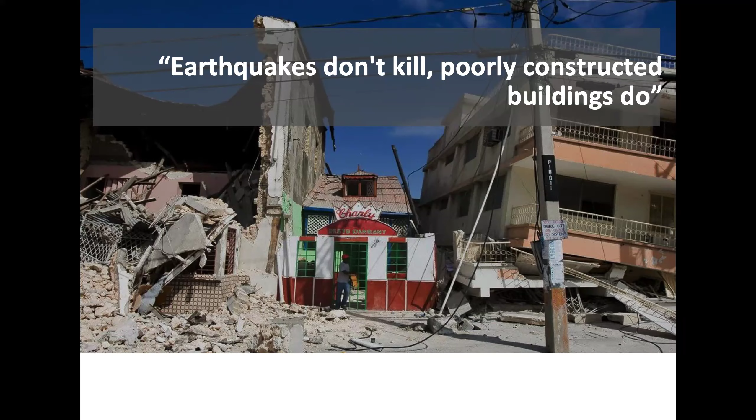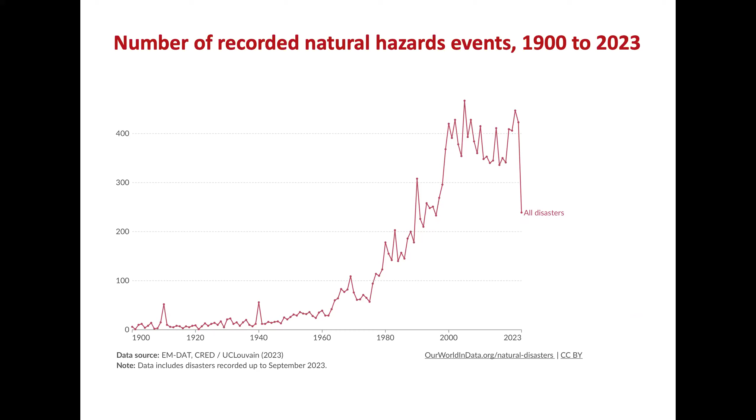And if you take the number of recorded natural hazard events from 1900 to 2023, this is a very, very good data set, and I'm glad that I managed to locate it. You can see the trend: the number of recorded natural hazards has been on the increase from 1900 to 2023. And if you do the same mapping based on the hazard type, with statistics from 1970 to 2023, you can see the distribution of natural hazards. It ranges from droughts, floods, earthquakes, and other extreme weather events, and so on.

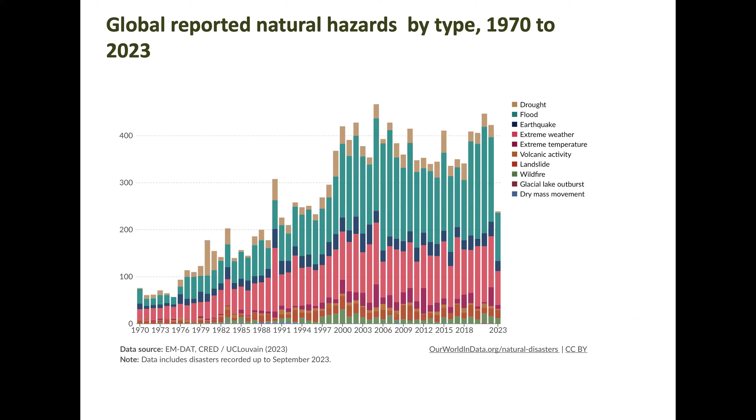So if you talk about the disaster losses due to natural hazards, it is fair to say that they are on the increase. It is said that the disaster loss calculation for 2023, again very up-to-date statistics, is US$250 billion, with more than 74,000 fatalities. And you can see the size of that: it roughly equals the entire GDP of either New Zealand or Portugal.

And thunderstorms in North America and Europe were more destructive than ever before. And you can also see the insurance figures here, US$95 billion, which is very close to the 5-year average, but it is above the 10-year average. So in that sense, I suppose the number of disasters and the disaster-related losses are quite an important point for us to consider.

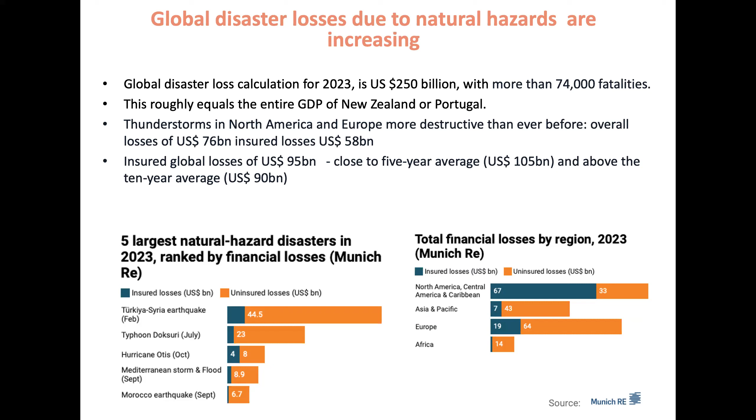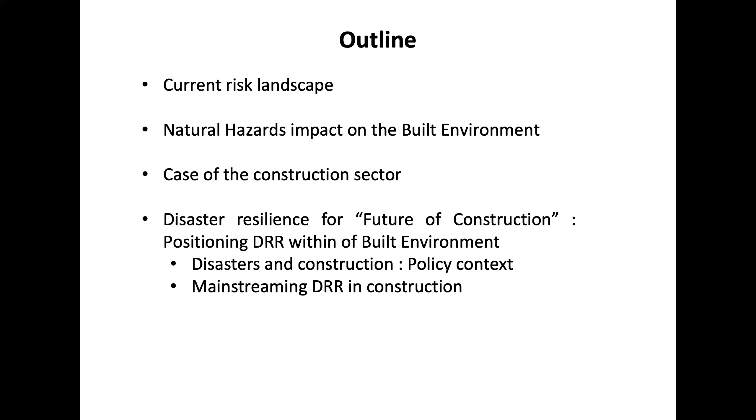So with that in mind, I just wanted to highlight the current risk landscape, which I hope I managed to give you a rough idea about. And then I will move on to the natural hazards impact on the built environment, and then reflect on the case of the construction sector. And then I wanted to put forward this notion which I want to identify as disaster resilience for the future of construction, and how we can position DRR within the built environment.

So I suppose this week is quite an important one, because we marked the first anniversary of the Turkey earthquake. I'm sure you have seen media outlets demonstrating various points. Just to reflect, in Turkey during the aftermath of the earthquake, around 37,000 buildings collapsed, with over 200,000 buildings heavily damaged, and around 53,000 lives were lost.

But within the backdrop of that, I'm sure you have seen these media cutouts saying, Turkey's earthquakes show the deadly extent of construction scams, and Turkey widens probe into building collapses as quake toll exceeds 50,000. So these were quite frequent sightings for us during the last year. And again, I have picked up some of the points from the media.

The plan was to build 319,000 safe homes, but having said that, Turkey's construction sector is struggling, and the number of newly constructed houses is nowhere near this number. It is estimated that the overall cost of the earthquake damage to Turkey is more than $103 billion, but so far the reconstruction effort has fallen well short of that mark. And critics say there's cause for concern about both the pace and the quality of the reconstruction. So this is quite an important point, bearing in mind the topic of today's talk.

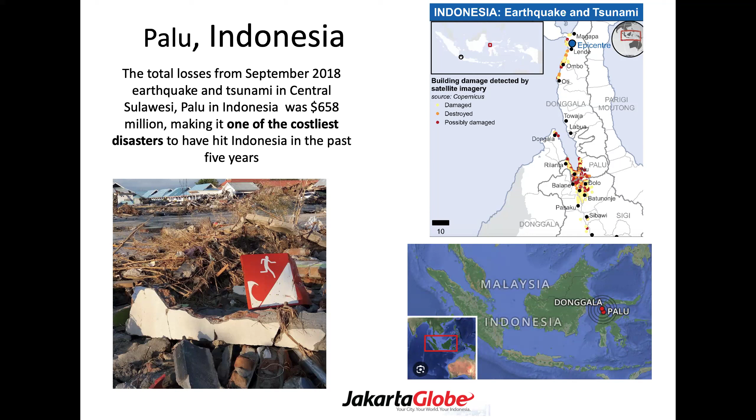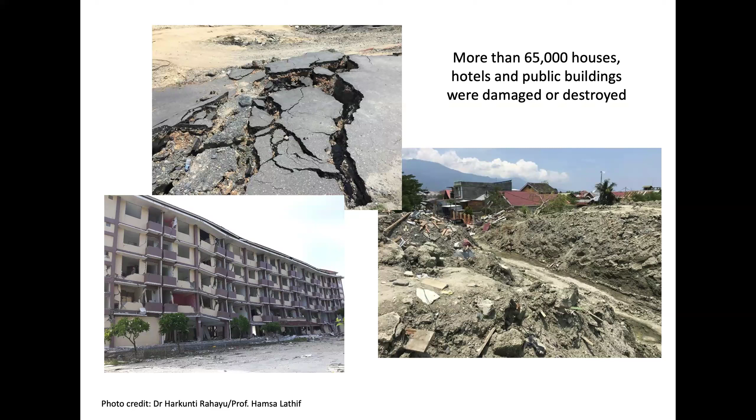If we move on from Turkey to Indonesia, the Palu, Indonesia earthquake in 2018. The damage due to the Palu earthquake amounted to $658 million, and it was one of the costliest disasters to have hit Indonesia in the last 5 years. In the map, you can see the location of Palu, on the island of Sulawesi. And more than 65,000 houses, hotels, and public buildings were damaged or destroyed due to this earthquake.

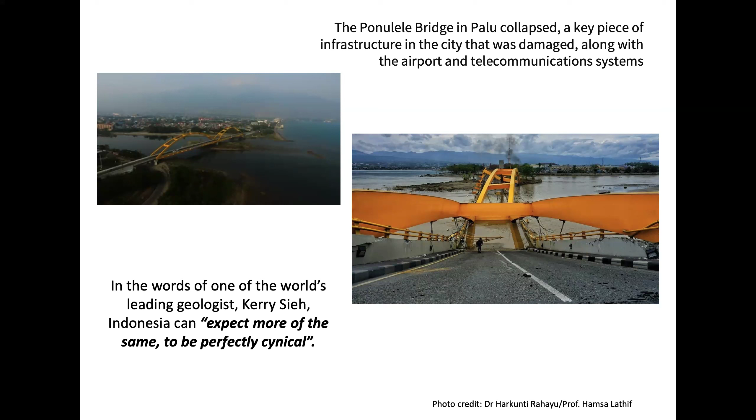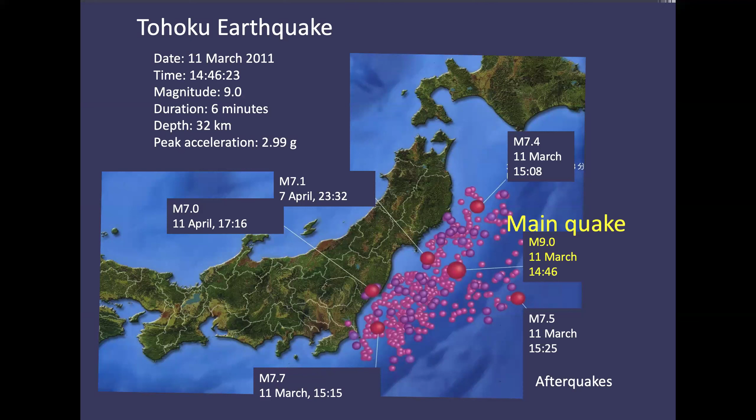And very briefly to reflect on the Tohoku earthquake, getting back to 2011. So again, you can see the map of Japan here, and the main quake was 9 points on the Richter scale. It occurred on the 11th of March 2011. And many government officers and researchers say the Tohoku earthquake was unthinkable, and I'll tell you why.

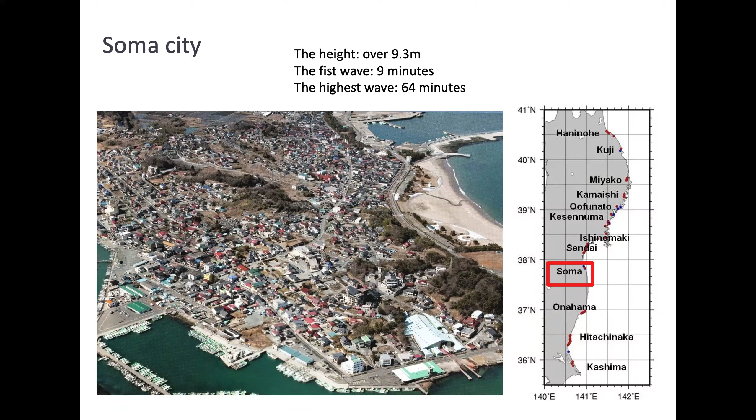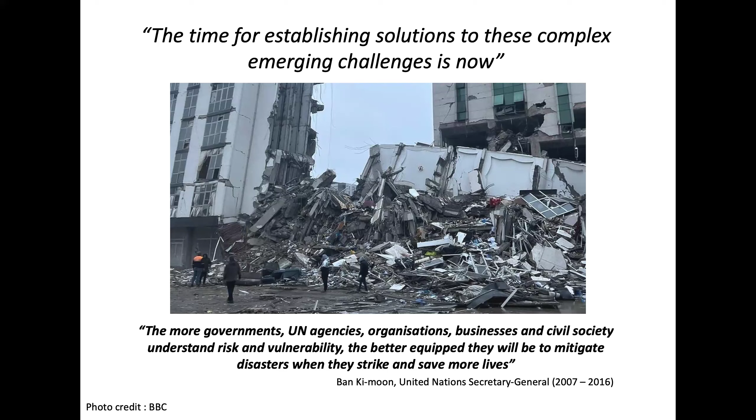So if we move on to the case of the construction sector, needless to say, I'm stating the obvious here. The construction sector is of strategic importance across the world. It delivers the buildings and infrastructure needed by the rest of the economy and society. And not only that, the construction value chain includes a wide range of economic activities, going from the extraction of raw materials, the manufacturing and distribution of construction products, up to design, construction, management, and control of construction works and so on.

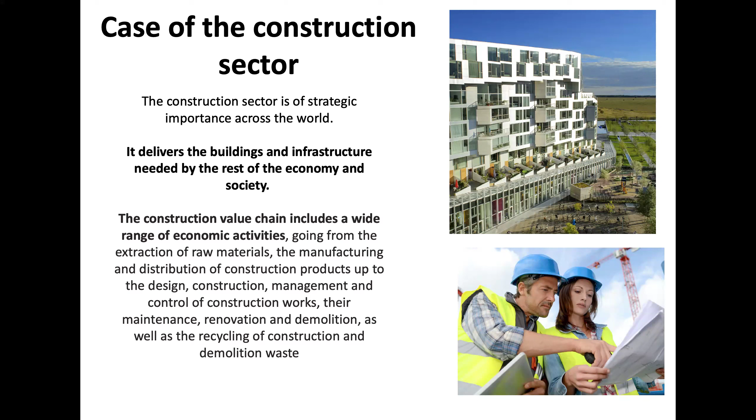So just to reflect on the size of the construction sector, this is a snapshot of the UK construction sector. The market size in 2022 was £473.5 billion. And there were 170,000 people attracted to the sector. And it contributes 7% of the GDP. And not only that, it provides a significant multiplier effect to the wider economy. And on the negative side, it consumes 40% of the UK energy, half of our water and a quarter of all the raw materials.

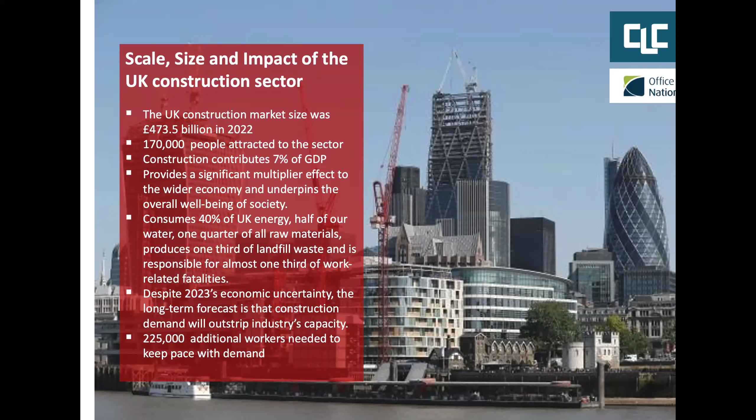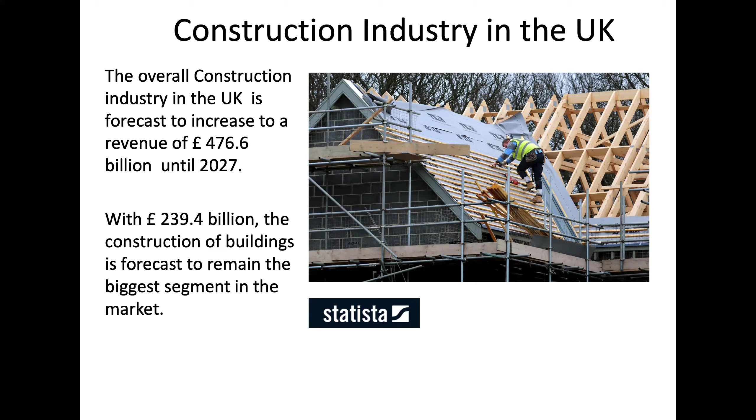But having said that, despite 2023's economic uncertainty, the long-term forecast is good. And it is predicted that 225,000 additional workers are needed to keep pace with demand. So with that in mind, it is also predicted that the construction forecast for the UK will increase to 476.6 billion until 2027. And out of that, the construction of buildings is forecast to be 239 billion pounds.

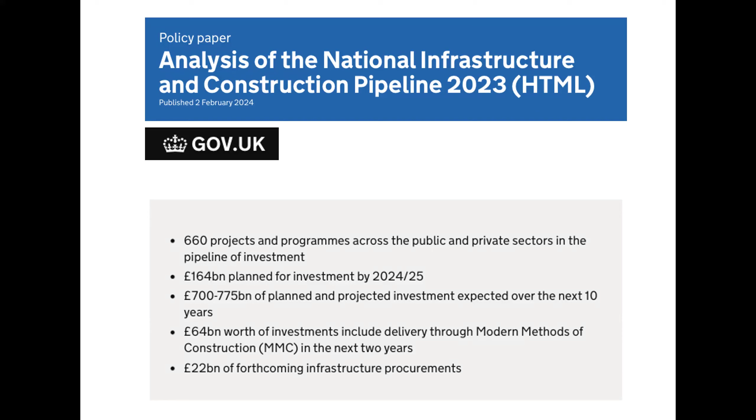And of course, very recently, on the 2nd of February, 2 weeks ago, a policy paper was published by the UK government. And it is anticipated that there will be 660 projects and programs across the public and private sectors that are in the pipeline. And also 164 billion pounds planned for investment by the 2024-25 cycle.

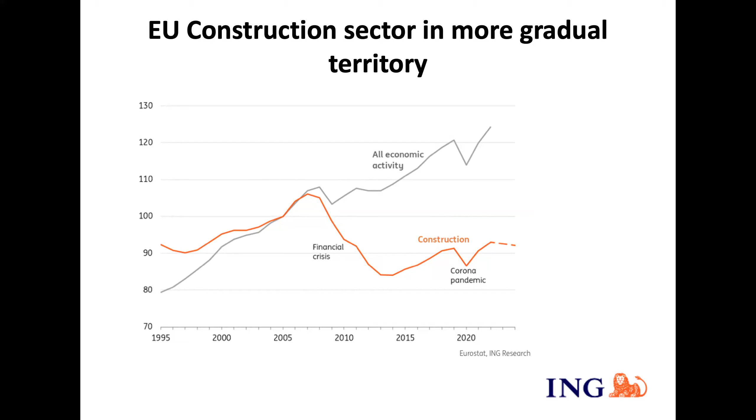So from the UK scenery, if we move on to the EU construction sector, it is a more gradual trajectory. As you can see, there has been a dip in construction output due to the corona pandemic, but it is now on the increase. So from the point of view of construction output, the construction market size attained a value of approximately 2,752 billion US dollars in 2023. These are the very latest figures. And it is expected that it will go up to 4,233 billion US dollars by 2032.

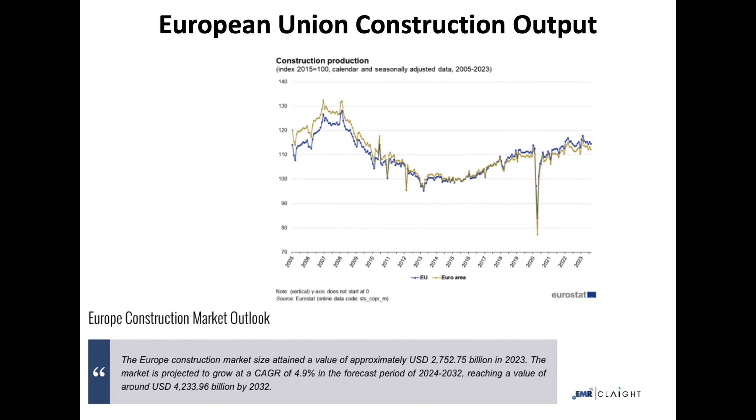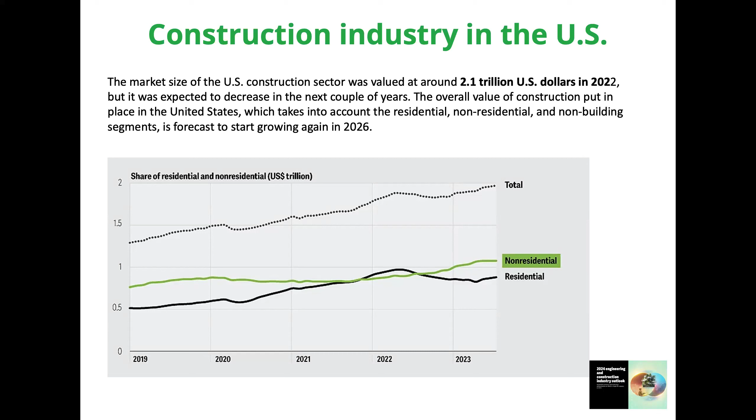So with that, I discussed the risk landscape, and then discussed the case for the construction sector. So how can we actually link the two together?

The point that I want to emphasize here is this concept called disaster resilience for future construction. The Future of Construction Initiative, for example, highlighted that there is a compelling need for the engineering and construction industry to create resilient infrastructure and housing to withstand disruption, absorb disturbance, act effectively in a crisis, and recover quickly afterwards. So this is the point that I want to put forward in linking resilience to disasters and how we can model the future of construction within that process.

To do that, let's very quickly revisit the policy context, the disasters and the construction. How can we bring them together under which policy? So very briefly, the Sendai framework. I'm hoping that a lot of you are familiar with this, but if not, in 2015, recognizing the increasing impact and complexity of disasters and to strengthen the risk reduction approach, UN member states adopted the Sendai framework, valid until 2030, at the World Conference on DRR held in Sendai, Japan. That is why it is named the Sendai framework. And it was ratified by the UN General Assembly in June 2015.

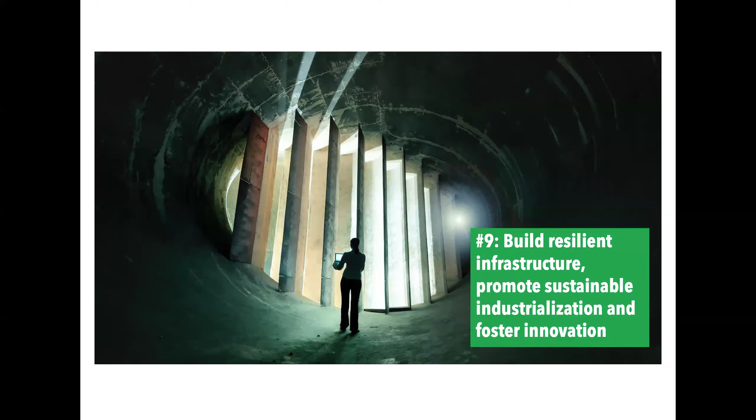And not only that, I'm sure you are all very familiar with the Sustainable Development Goals, with no one to be left behind. This was adopted in New York in September 2015, with 193 member states signing, and includes 17 Sustainable Development Goals, of which 2 goals directly relate to our sector, particularly goal number 9, which deals with build resilient infrastructure, promote sustainable industrialization, and foster innovation. And the next one is goal number 11, which talks about making cities inclusive, safe, resilient, and sustainable.

In addition to these global agendas, if I were to take the UK examples, the Royal Institution of Chartered Surveyors and the Institution of Civil Engineers in the UK have both highlighted the need to build first time better and build back better after a disaster. This is very much on the agenda. I have picked up the UK scenario here; I'm sure in most countries the situation remains the same. And also, a lot of reports have been published since the Indian Ocean tsunami in 2004, highlighting the importance of post-disaster reconstruction. So these are 2 reports that I would like to highlight here.

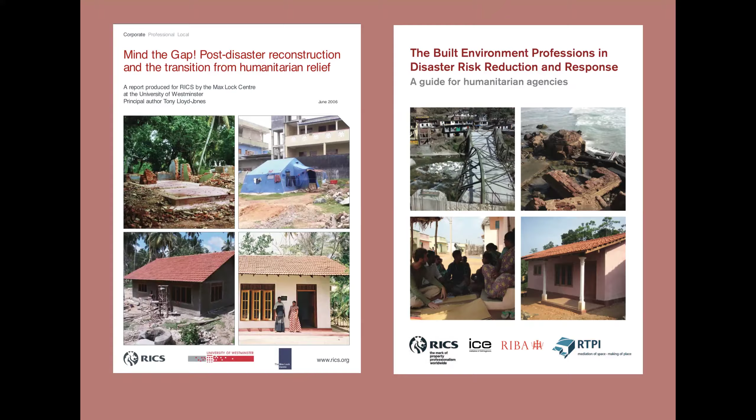Then to move on to the concept of resilient built environment, what does it mean? How does it look? This is the definition that we came up with within our research center. It is to design, develop, and manage context-sensitive buildings, spaces, and places which have the capacity to resist or change in order to reduce hazard vulnerability and enable society to continue functioning economically and socially when subjected to a hazard event. It's quite a mouthful, but we just try to capture the key components.

Some of the characteristics of the resilient built environment are listed in this slide. For example, it should have the capability to understand hazard threats. It should have local and external capacity development capabilities. Culturally appropriate methods and technologies need to be used. The infrastructure needs to be protective, and it should be possible to retrofit when there's a need. And there need to be response plans, temporary shelter and services.

So this is how I would like, as a snapshot, to demonstrate to you the concept of resilient built environment. Its characteristics take in both the products and the process of the built environment. I would like to take this as a kind of system of systems. Of course, construction is quite important, as you can see in this diagram.

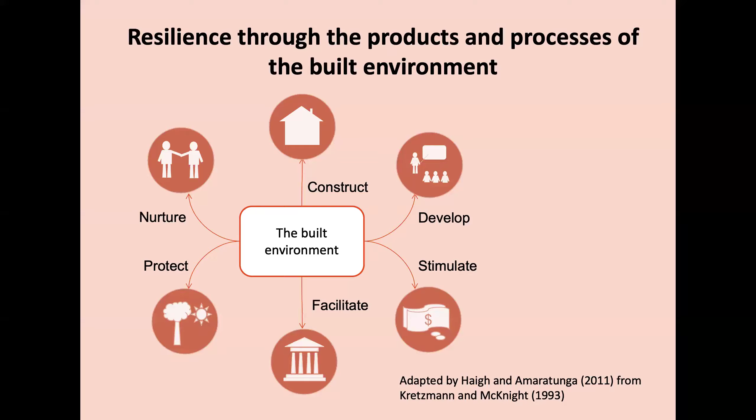So this is how I would like to actually see the resilience of the built environment through products and the processes. It's not only the product of the construction, but it is actually a combination of so many other aspects as well, as I have emphasized in this diagram. But it is easy to say, but there are very, very difficult questions that we need to be dealing with. What scale of challenge should we prepare ourselves for?

Okay, let's actually go back to the 2011 tsunami in Japan. So this is actually the Kamaishi port, and you can actually see I have marked the tsunami breakwater. The tsunami breakwater is an offshore structure that restricts the inflow of tsunami and storm waves into a harbor by narrowing the entrance. So we call that sort of a structure a tsunami breakwater.

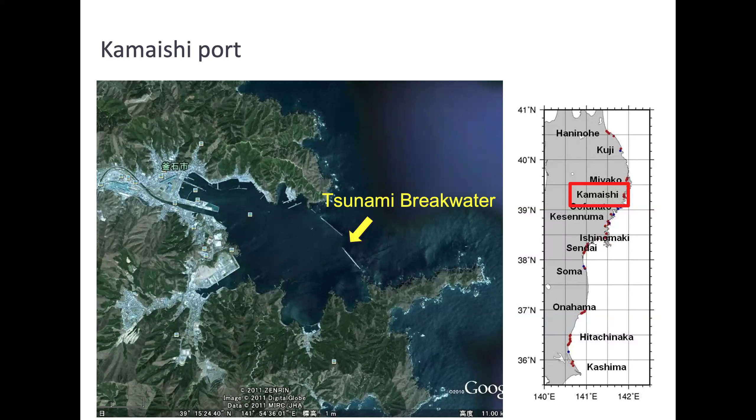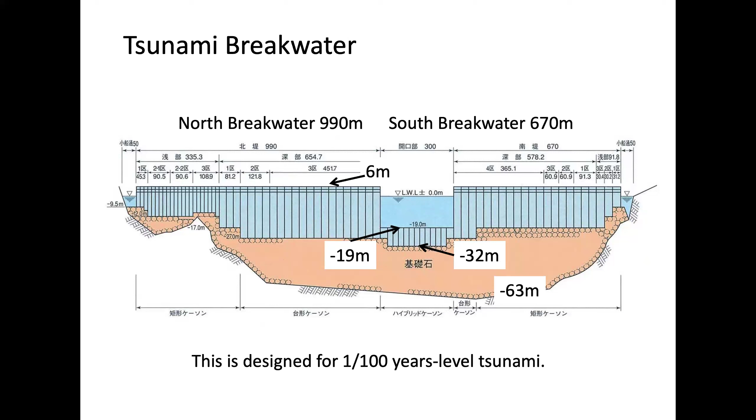So in Kamaishi, Japan, the breakwater was in the world records as the deepest structure on the planet. This was actually done out of concrete. It is nearly 207 feet deep and was designed to blunt an incoming tsunami. So this is actually where it is. And this is the cross section of the tsunami breakwater, which was costed at 1.6 billion at the time. And this was designed to withstand a 1 in 100-year tsunami.

But the tsunami made short work of it, as you can see in 2011. When a giant tsunami hit Japan's northeast in 2011, the breakwater crumpled under the first 30-foot-high wave, leaving Kamaishi defenseless, as you can see. Waves deflected from the breakwater are very strong, and they are suspected of having contributed to the 60-foot waves that impacted communities north of it. So it actually had a knock-on effect as well.

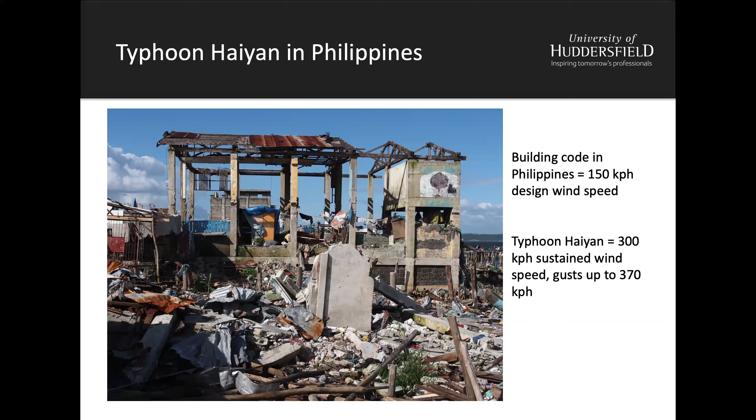So if we move on to Typhoon Haiyan in the Philippines, the building codes there were constructed to withstand a 150 kph design, but Typhoon Haiyan was actually at 300, almost double. So there are some very difficult questions for us to deal with. How can the construction industry stay ahead of these natural hazards? What scale of challenge should we prepare ourselves for?

And also, disaster prevention facility. For example, the previous example I demonstrated, the 2011 tsunami breakwater, was designed for 1 in 100; does it mean that we need to design one for a 1 in 1,000-year level earthquake? But having said that, then what is the cost versus effect of that? And also the land use associated with disasters. Should people live in upland? Or in that sense, the convenience versus safety. So there are a lot of difficult questions that we have to be dealing with in taking precautions against disasters within the construction sector.

So I take it as mainstreaming DRR in construction. That is what we need to be doing. In most development initiatives, I think it is fair to say that the option of designing and building to reduce vulnerability of infrastructure to natural hazards has often been ignored, because of perceived high cost and perhaps due to lack of appropriate expertise. But having said that, it is very, very important that we consider this in view of increasing disaster risks due to growing urbanization and so on, as I discussed before. So it is essential to incorporate DRR principles into the construction sector.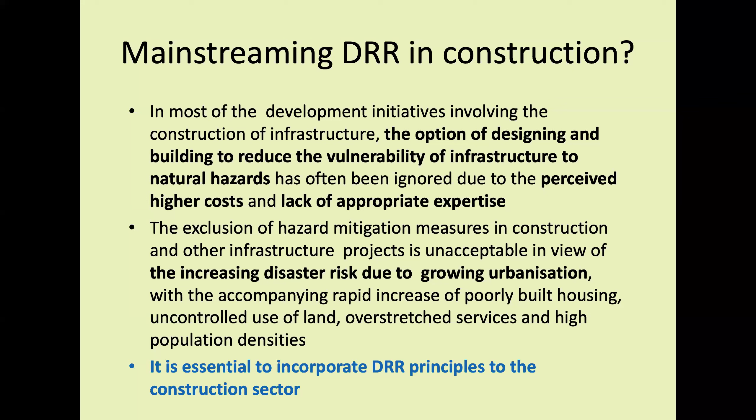But having said that, again, investment decisions. These are some of the points that we can always use to highlight the importance of investment. It says that for every $1 spent to make existing buildings more resistant to wildfires, earthquakes, floods, and hurricanes, $6 can be saved in property losses, business interruption, and health problems. And in the same vein, it is said that for every dollar spent to exceed building codes and make structures more hazard resistant in the future, we can save $4.

These are small amounts when you can see, but then when you multiply this into millions, you can see the difference. So in that sense, over the next 75 years, these measures could prevent up to about 600 deaths and also 1 million injuries and about 4,000 cases of post-traumatic stress disorders. This was highlighted by the Natural Hazard Mitigation Saves in 2017.

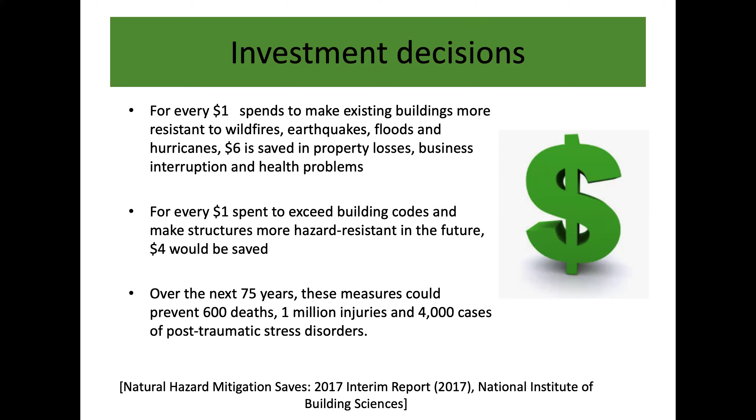So all in all, there need to be changes in order to address these complex challenges associated with resilience building. The role of the built environment professional needs to change. That is what I want to highlight here.

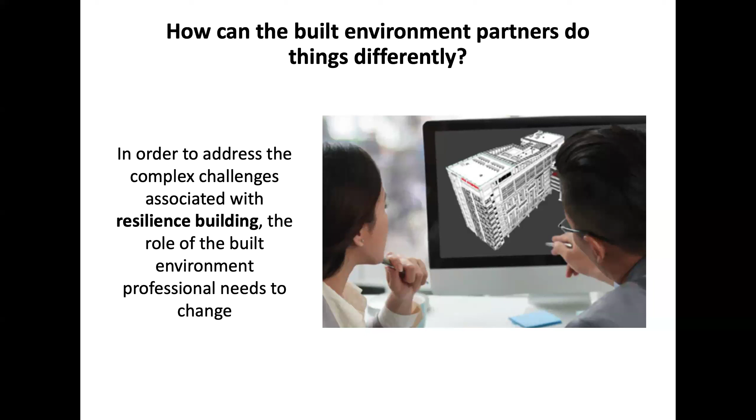Linking with that, in line with the Royal Institution of Chartered Surveyors in the UK, we carried out some research, and then we published a report in 2022, Rethinking Construction to Reduce Disaster Risk, a guide for built environment professionals. This was done based on all the points that I highlighted before in terms of increasing disaster risk, the case for construction, and how we can link the definitions of resilient built environment.

So from that, there are some points that we came up with in terms of areas and levels to integrate DRR in the construction sector. So we have divided it into 5 sections here: education, policy perspective, practice, cross-cutting, and research. So if you take very briefly how we can integrate DRR in the built environment sector from the point of view of education.

Of course, we need to have a multi-stakeholder approach. All the stakeholders need to be coming together, and also a multi-hazard approach. The time where we have to think about hazards in isolation is long gone. We have to think about holistic approaches in terms of multi-hazard approaches, and also systemic risk, natural hazards occurring at the same time as other hazards. For example, during the COVID pandemic, there have been a lot of natural hazards that we had to face. So we need to be thinking about systemic risk.